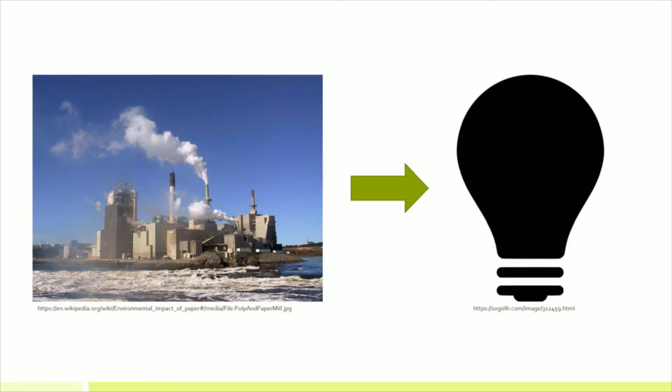Currently, pulp plants are able to generate power for sale in the local grid using recycled steam energy. The production of white liquor in the lime cycle produces large amounts of carbon dioxide as a byproduct. Lime reburning requires temperatures in excess of 900 degrees Celsius, powered primarily by fuel oil or natural gas.

The objective of this project is to determine the potential for running an industrial electrolysis plant from the excess heat created in steam processes, then burning the resulting hydrogen in the lime kiln to reduce the required fossil fuel. This includes recycling the oxygen byproduct in the bleaching process. The goal of this project is to validate that this electrolytic application would be both financially and environmentally feasible for current and future kraft pulp plants.

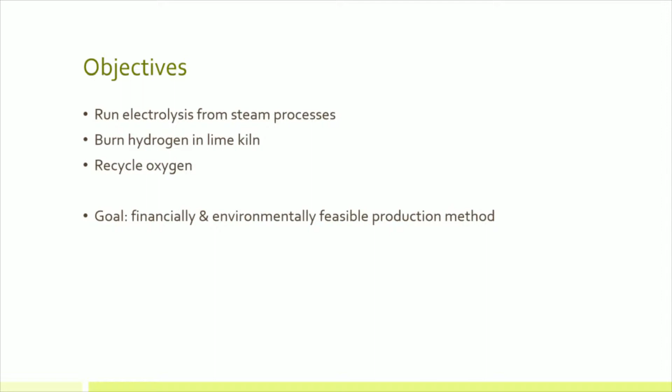The primary goal of inducing an electrolytic process in the mill is to produce hydrogen gas, which can then be burnt in a modified lime kiln along with typical fossil fuels. The combustion of hydrogen produces a large amount of heat per kilogram. However, since hydrogen gas combusts easily and is very light, it is tricky to transport and burn efficiently. These concerns are easily addressed when the hydrogen is immediately used on site.

Although natural gas produces less carbon dioxide than fuel oil per watt, the cost of extraction and transportation must be accounted for. Due to the leakage of methane, natural gas power plants are actually often worse than those burning coal. Replacing the fuel oil, or even some of it, will greatly decrease the carbon footprint of this process.

For every gallon of fuel oil, 11.27 kilograms of carbon dioxide is produced. With plants using upwards of 150 tons per day of fuel oil, a single lime kiln can produce upwards of 446,000 kilograms of CO2 every day.

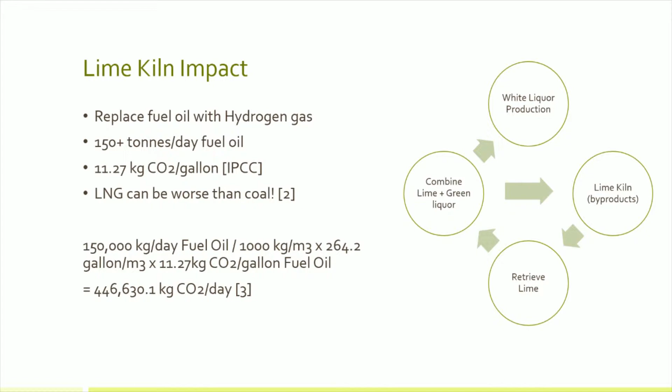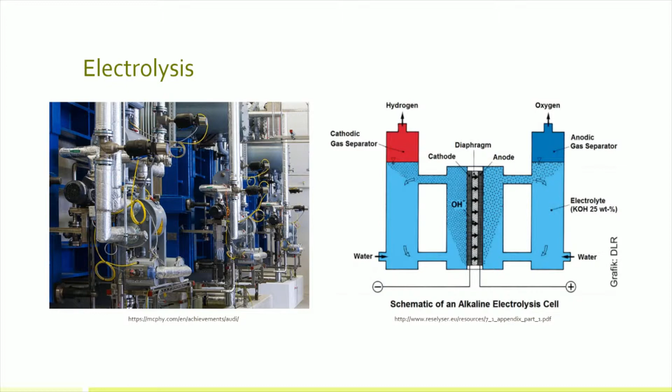Electrolysis is the process of separating hydrogen and oxygen in water by use of a DC current. On the right is a diagram of an alkaline electrolysis cell, and on the left is an image of a real-life cell in operation. Electrolysis is a carbon-neutral method of storing energy by producing combustible hydrogen gas. In fossil fuels, pollutants are related to carbon-containing compounds released during the burn, but burning pure hydrogen produces no carbon.

Electrolyzing water also produces oxygen, which can be used in environmentally friendly bleaching processes. In this case study, the oxygen produced as an electrolysis byproduct is sufficient to meet the bleaching needs of the studied plant.

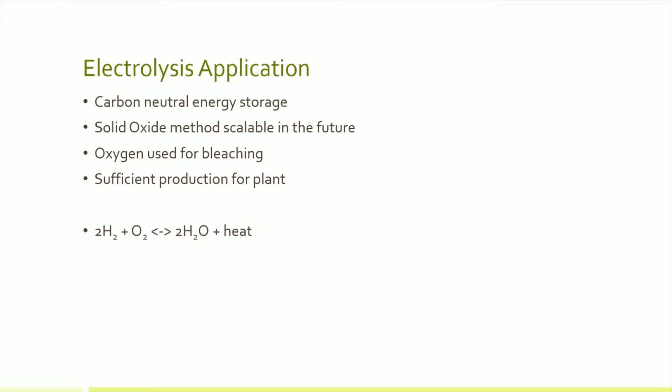To demonstrate the potential for using electrolysis to produce lime kiln fuel, an existing mill was modeled. The selected model was developed for the paper The Impact of Lignin Removal on the Dimensioning of Eucalyptus Pulp Mills by Hamaguchi, Vakkilainen, and Ryder. This model was used in the original paper the video is based on.

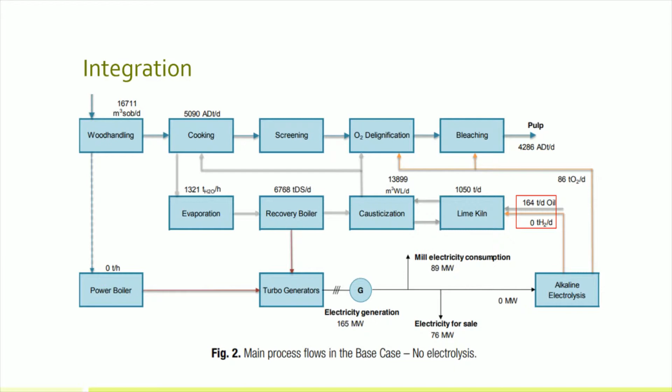In the shown case, fuel oil was replaced with the maximum amount of hydrogen possible to produce in the plant. Since hydrogen has a very high energy density, 119 tons of fuel oil can be replaced with only 38 tons of hydrogen gas.

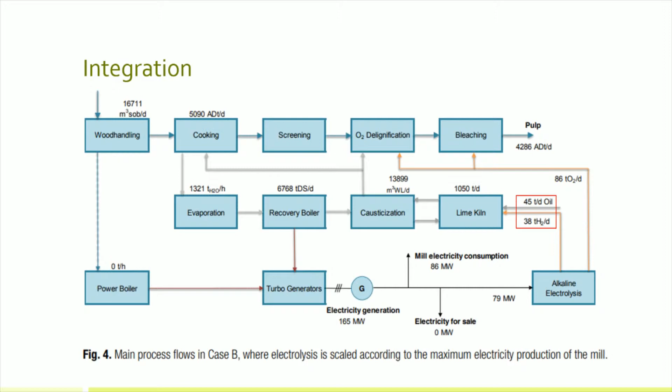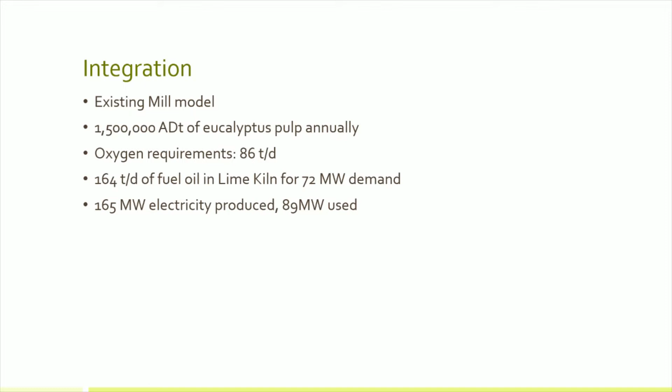The selected mill produces 1,500,000 air-dried tons of eucalyptus pulp annually, or 4,286 air-dried tons per day, with 350 operating days per year. Oxygen requirements for delignification and bleaching are 86 tons per day. The plant uses 164 tons of fuel oil daily to meet a lime kiln heat demand of 72 megawatts. The total electricity generation is 165 megawatts, with 89 megawatts consumed by the mill.

The results of the case studies are indicative of the potential gains of using an electrolytic process. As Case B uses the maximum amount of electricity possible, Case B uses a little more than triple the electricity of Case A, which only produces enough oxygen to meet the demands of the plant. Hydrogen production increases by more than 25 tons per day, and oxygen by over 200.

Much more feed water and cooling water are required. Inlet, outlet, and reaction temperatures of the water are held constant for both cases. The amount of electricity for sale in Case A is 72% what it would be without electrolysis. Oil requirements decrease by 20% in Case A and a whopping 73% in Case B.

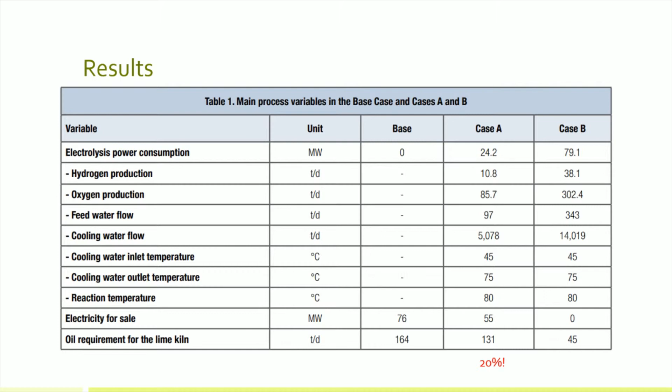One pound of fuel oil with a standard 50% excess air produces 3.16 pounds of carbon dioxide. In Case B, 119 metric tons of fuel oil would be saved per day. This fuel oil would instead be replaced with 38 tons of hydrogen gas. That's 131,000 metric tons of carbon dioxide per year, which, according to the California Air Resources Board, is equivalent to 28,300 passenger cars not being driven.

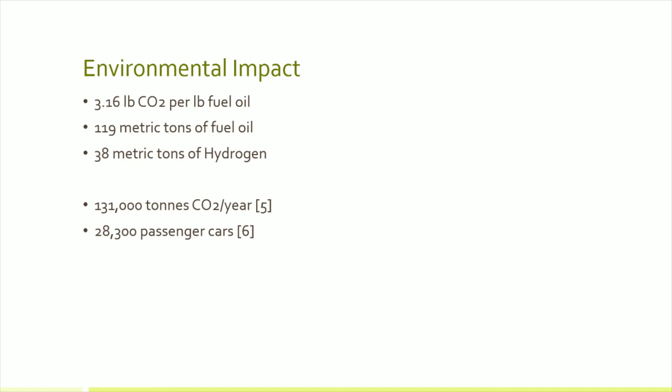There are three key factors to consider when evaluating the effectiveness of implementing electrolysis into a kraft pulp mill: electricity price, possibility to sell electricity, and fossil fuel price. This excludes the invisible value of reducing net greenhouse gas emissions, which should always be considered by responsible plant owners when evaluating capital work. Note that this economic evaluation does not consider the capital cost of installing electrolysis in the plant either.

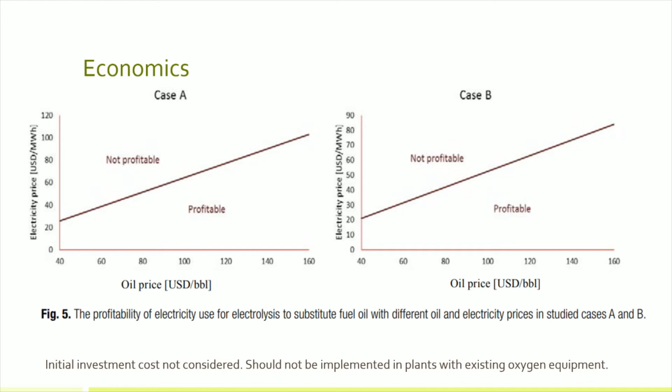It is assumed that the method would not be financially viable for installation in a plant with existing oxygen production means. Implementation of hydrogen storage is economically desirable in locations where barrels of oil are prohibitively expensive and in places where electricity resale prices are low. Here are the graphs for profitability versus non-profitability for each case. The following graphs indicate whether case A or B would be profitable to implement.

Though not directly more profitable than selling electricity to the grid, there are many benefits and circumstances where this application is relevant. Calculations performed for this study did not consider savings in purchasing oxygen. Furthermore, if a new plant was built with excess oxygen production in mind, more processes could be designed around it. There is also the potential to upgrade it to be used as the more effective ozone. This could potentially offset the cost.

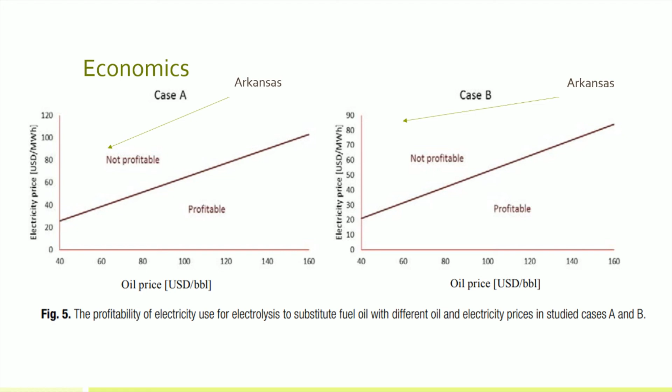In summary, the integration of electrolysis can be both financially and environmentally feasible. Alkaline electrolysis was examined based on producing sufficient oxygen for bleaching and on using all the electricity available, resulting in a 20% and a 73% drop in fuel requirements at the selected plant. The environmental impact of implementing the system at the given eucalyptus mill would be the equivalent of removing 131,000 metric tons of CO2 from the air every year.

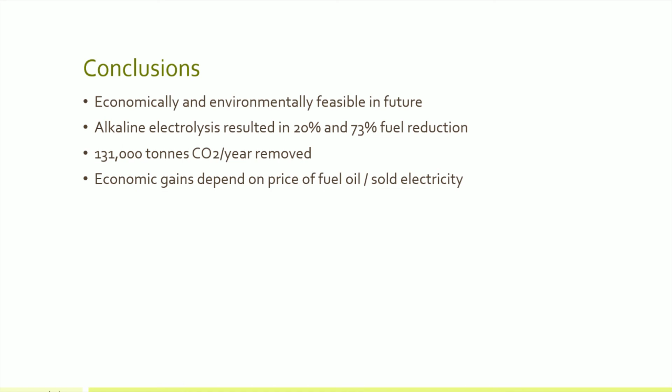Using electrolysis may be financially beneficial in the future as oil prices rise and electricity prices drop. The system is only beneficial if and when the fuel oil price is high and electricity can only be sold cheaply.